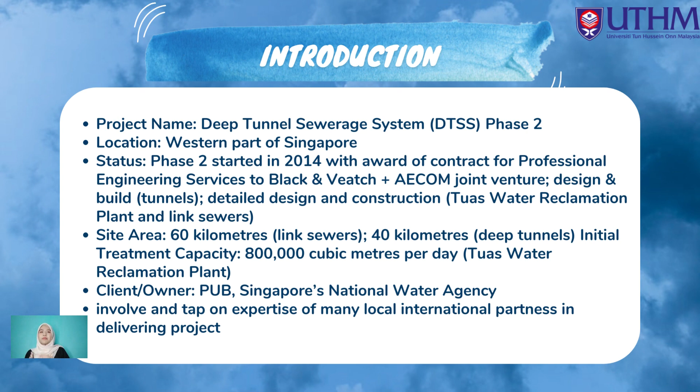This project involves and taps on the expertise of many local and international partners in delivering the project. This project has its own objectives. The first objective is to meet the long-term needs of Singapore for used water collection, treatment, reclamation and disposal. Other than that, the objective is ensuring NEWater sustainability, which is to collect used water from the western and southern parts of Singapore. Another objective is environmental protection, which is to enhance reliability of the used water system and minimize risk of contamination between water catchment and the used water system.

And used water is transported separately by gravity from municipal and industrial sources to the newer Tuas WRP via the conveyance system. The last objective is optimizing land, with a 50% reduction in land taken up by used water infrastructure.

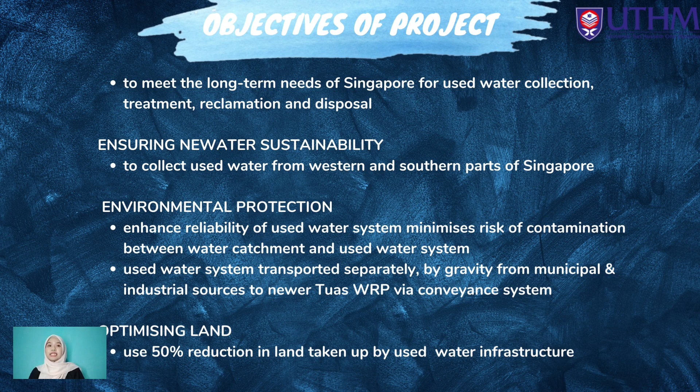Today I will present about the construction process for Deep Tunnel Sewerage System Phase 2. DTSS Phase 2 consists of 40 km of tunnel with internal diameter of 3 meters to 6 meters, 60 km link sewers with internal diameter of 0.3 meters to 3 meters, and a 176 mgd plant at Tuas West with a 25 mgd NEWater capacity. It includes construction of hydraulic structures and an air management facility.

Firstly is geology. The DTSS Phase 2 tunnel is expected to go through rock and expected to go through soil. There will also be many locations where the DTSS Phase 2 tunnel will encounter mixed face conditions. Second, tunnel inspection. The DTSS Phase 2 tunnel will be designed with the provision for tunnel inspection by remotely operated vehicle. DTSS Phase 2 tunnel will have only on-line shafts.

The third is tunnel monitoring. As an added feature, DTSS Phase 2 will also explore the use of fiber optic cable cast into the tunnel lining for structural integrity monitoring. Longitudinal installation of fiber optic cable cast directly into the CPL during its construction.

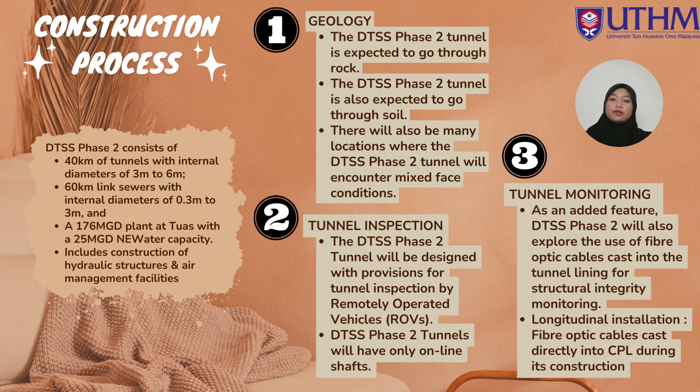Next, fourth, air management. The tunnel conveys both used water and air, to control the flow of this air and to prevent any odour nuisance. An air management facility will be installed wherever a link sewer connects to the tunnel. This air management facility consists of both an odour control facility and an air jumper. The odour control facility draws air from both the link sewer and tunnel and treats the air before releasing it back to the atmosphere. Negative pressure in the tunnel may not be sufficient to pull incoming link sewer air.

The air jumper forces the air into the tunnel, and serves as forced ventilation to prevent air from the link sewer or tunnel from escaping into the surroundings. Fifth, tunnel isolation. Another new feature in the DTSS Phase 2 tunnel is the ability to isolate sections of the tunnel using gates. A gate can be lowered in the shaft to block flow in the tunnel. The gates to be used in the tunnel will be roller gates. Large section drop-in gates are used for isolation within the combined sewer tunnel conveyance system.

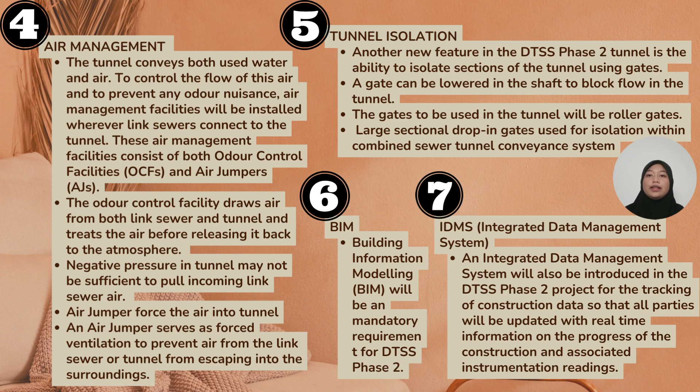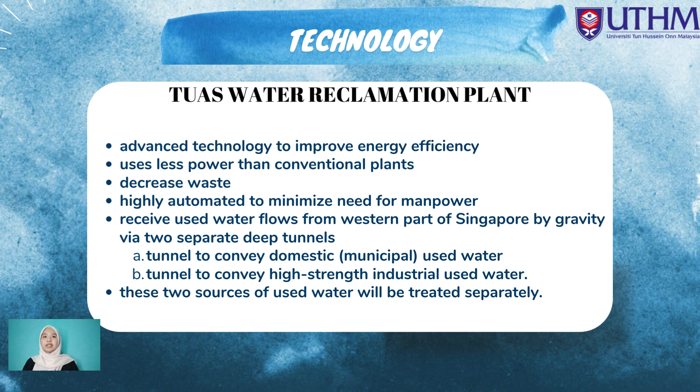So, for this project, the technology being used is the Tuas Water Reclamation Plant. This is advanced technology to improve energy efficiency. It also uses less power than conventional plants. It also decreases waste and is highly automated to minimize the need for manpower. It receives used water flow from the western parts of Singapore by gravity via two separate deep tunnels, which are a tunnel to convey domestic municipal used water and a tunnel to convey high-strength industrial used water. These sources of used water will be treated separately.

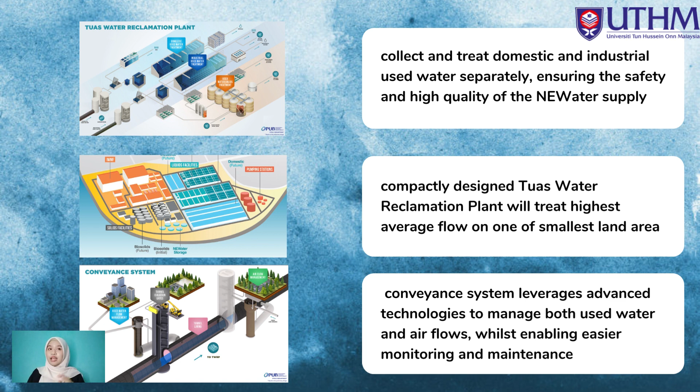So, this system can collect and treat domestic and industrial used water separately, ensuring the safety and high quality of the NEWater supply. The Tuas Water Reclamation Plant is compactly designed to treat the highest average flow on one of the smallest land areas. This conveyance system leverages advanced technologies to manage both used water and airflow whilst enabling easier monitoring and maintenance.